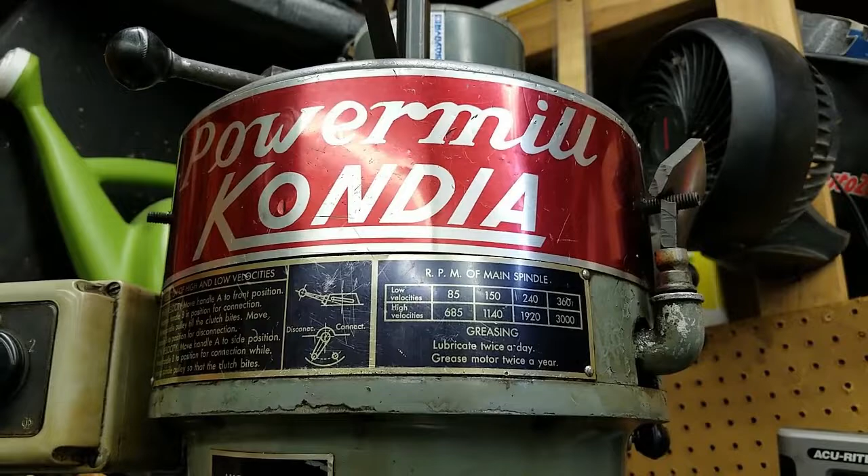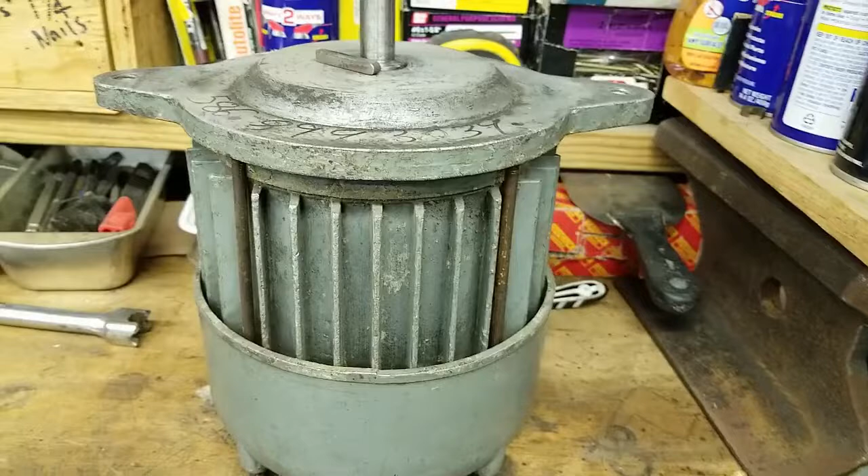Alright, what you're looking at here is the motor, the original motor I assume, off of the mill. And this mill is, I believe, from 1969.

Several weeks ago, I was doing some work. I've been doing quite a bit of job shop work out here. And I started smelling something funny, but I wasn't sure what it was. It didn't really smell electrical. And I had a problem with my switch, and I had redone my switch, so I didn't know if maybe it was some of the cleaning spray that I used burning off, but there was a smell.

Well, as I'm working, the lights in the garage flickered, the fluorescent lights above. And it was raining and storming outside at the time, so I thought, well, maybe it was starting to lightning or something. So I looked up to see if it did it again, waiting for a crack of thunder. And about that same time, I seen a little bit of smoke wisping up from the motor. So I hurried up and shut everything off because the spindle started slowing down on its own without even being under load.

And lo and behold, I reached up and touched the motor, and this casing was hot as fire. I mean, you could literally fry an egg on the thing. So I shut everything down and stopped working for the night.

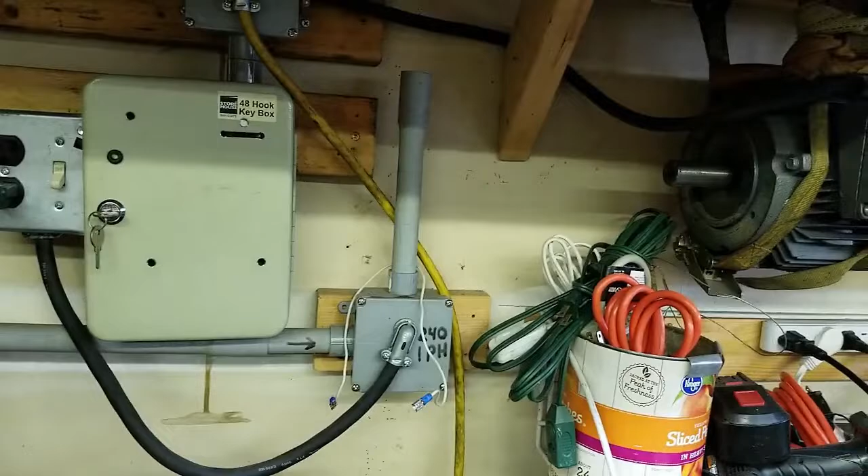So, I'm not an industrial electrician or anything, but I do my own work on certain items that I feel comfortable doing work on. So I'm like, well, is it the motor? Is my rotary phase converter going bad? I don't know. So here we are at the rotary phase converter - 3 horsepower, 3-phase motor. I've done a video on this.

The only thing I could think of that might have gone bad was a capacitor had popped or something. So I did the best I could, since I don't have a capacitance tester, but I tested the capacitors to see if they would accept a charge, a very light charge, and they did. They accepted the charge, and they could withdraw the charge using my digital multimeter. I checked everything else, all the wiring, to make sure all the connections were tight.

Everything seemed good. So I'm nervous about running any of my other machines at this time, my lathe and my surface grinder, because I don't know if the rotary phase converter is bad, and I don't want that burning up my other motors. So, what do I do, right? What do I do?

So, back over to the motor. I decided to remove this from the mill, and I disassembled it all the way down, took the armature out, the whole 9 yards. Right about now, maybe you're seeing some still pictures flashing because that's all I have of that work, because during this time I did have some work that needed to be finished.

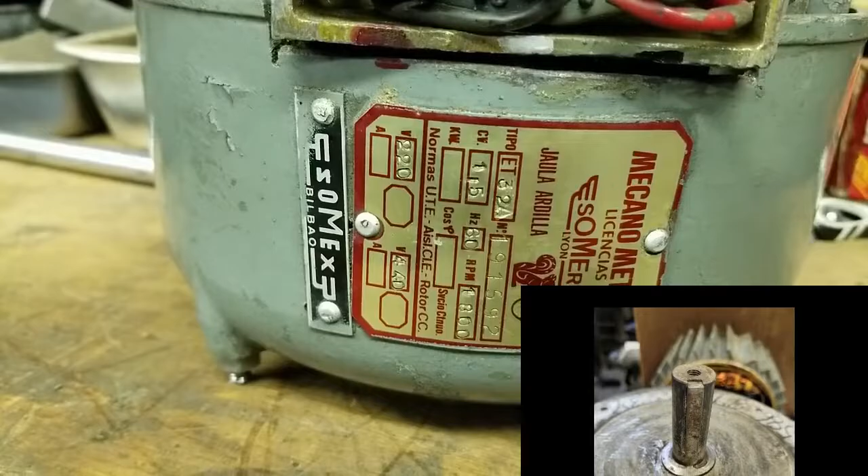So, took it all apart. I needed to measure a bunch of stuff. I needed to see what was going on. Some of the motor shops, electrical shops around here said if I give them a bunch of dimensions and some pictures, they could probably quote a price, an estimate, to rebuild the motor. So that was my intent, was to try to look for myself to see what was going on, as well as put some dimensions down on paper, get some still pictures, and send that out to see what kind of quote would come back for rebuilding this thing. So that's what I did.

You see the pictures. I could take a look at how this thing was constructed. This is a 1.5 horsepower 3-phase motor. I don't remember what the shaft diameter is right now. But you look at this thing and it's quite specific.

This here is the adjusting plate. I have a pulley, step pulley motor, or a mill. So you have a pulley here and a pulley that's on the main shaft. And then one of these is a pivot, and the other one is the lock. Looking at this, this would be the pivot, this would be the lock over here. Not important, but...

So what do I do, right? So I start hunting down motors. How much do motors cost? $400, $500, $600, you know, they're around. Some are on eBay, some are here, some are there.

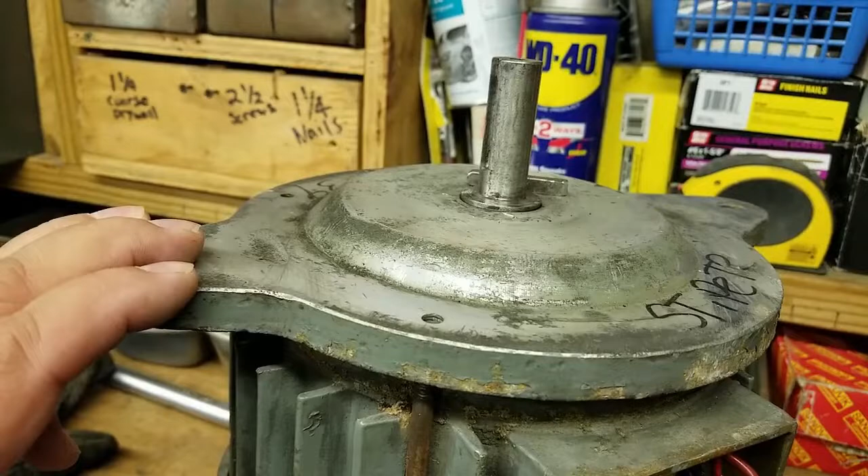Finally the quotes start coming in. I know this is long and it's all talking, but I did get a couple of quotes. One quote was for $4,000. I just laughed that off. I figured they just didn't need the work, they had plenty of work and they were just blowing me off. Another company said it would be a minimum of $1,000. Even then, it's an old mill - if I'm going to start spending $1,000, I might as well just buy a better used mill. So that was even a joke.

So I'm looking and looking, and I finally contact one of my friends who's been in the business forever. He gives me a name and number. They've got a motor that's in California, but it's like $850, plus another $100 and something for shipping. And guess what? The shaft is not the right shaft, so I'm going to have to do something anyhow - so it's not even ideal. Same thing on eBay - you could find lots of motors that are 1.5 horsepower, 3-phase, 1800 RPM, but the shaft is way smaller.

So I'm just hunting around. What do I got to do? Put everything back together quickly and try to limp through finishing up my work.

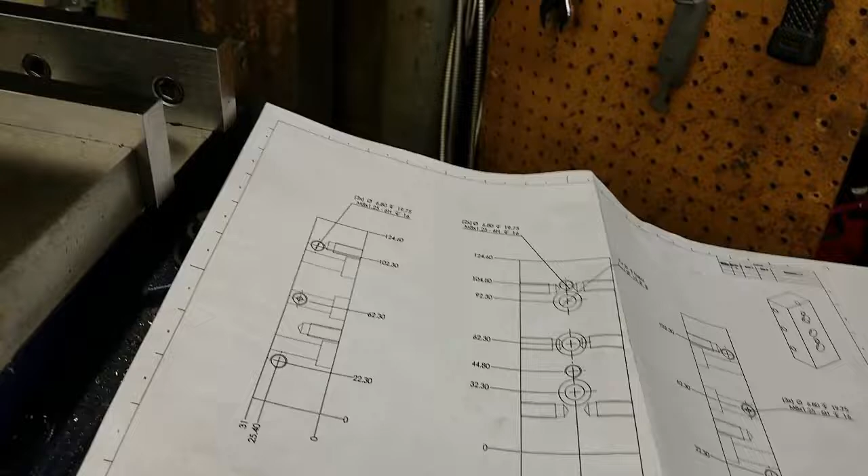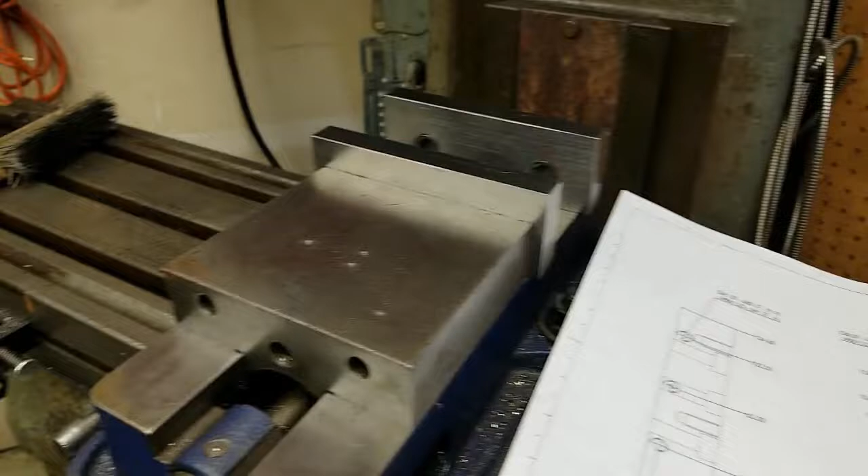At that point in time, all I could do is limp through on this mill. I could run the machine for maybe a consistent 35, 40 minutes before the motor was so hot you couldn't touch it. So I'm just barely doing the minimum amount of work that I can do - trying not to take long facing cuts, just because of the way the machine is acting. And it's very frustrating, it's very disheartening. I'm trying to get all the work done.

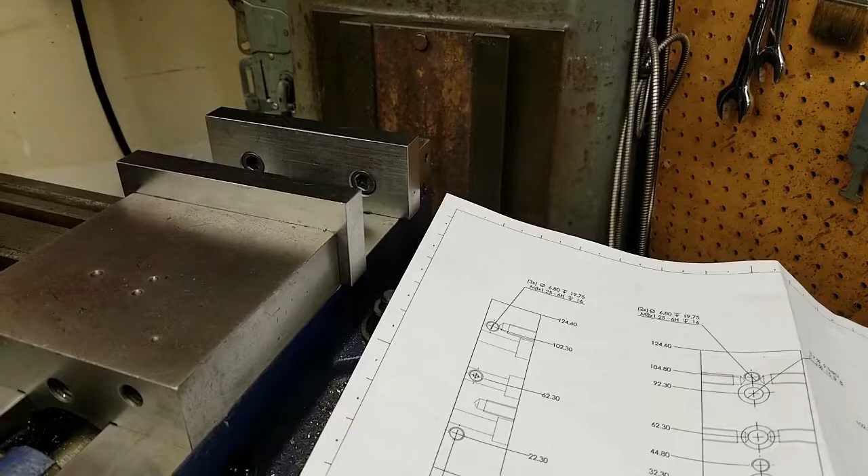Eventually I do run out of time. The customer wants their work back. I got to take a couple pieces back that I couldn't get to, just because the mill - I couldn't rely on it, and I didn't want it to go any further than it had already gone.

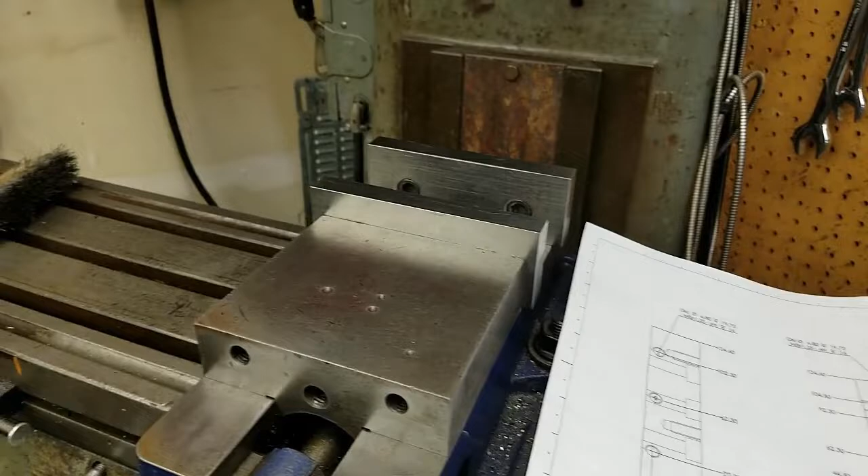So I'm almost out of options. I'm pricing out mills, trying to look at what some friends have. A couple of friends had some stuff for sale, but I got to move it, got to get it over here. Some of them didn't have digital readout, some had this, some had that, you know.

If I'm going to get another mill, I want to replace the step pulley with a variable speed. I want digital readouts - I do have a digital readout I could take off of here. I want the gibs and the ways and everything to be good. I don't want to have to live with problems like I do currently.

This mill I bought years ago, 5-6 years ago, and the mill, the digital readout, the vise - not this vise, my Wilton vise - rotary table were all $1,500 or so. So it was a good deal. I couldn't pass it up, and it got me started doing some machine work.

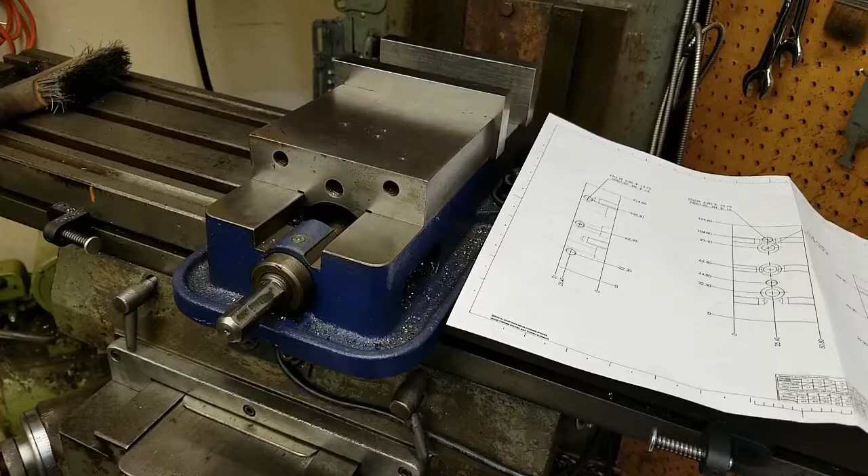So now I get on Facebook Marketplace and look to see if by chance somebody's got a motor on there. And there's a lot of motors. Well, I ended up coming across a guy that was within a couple miles of my house. He had a 1.5 horsepower 3-phase electric motor.

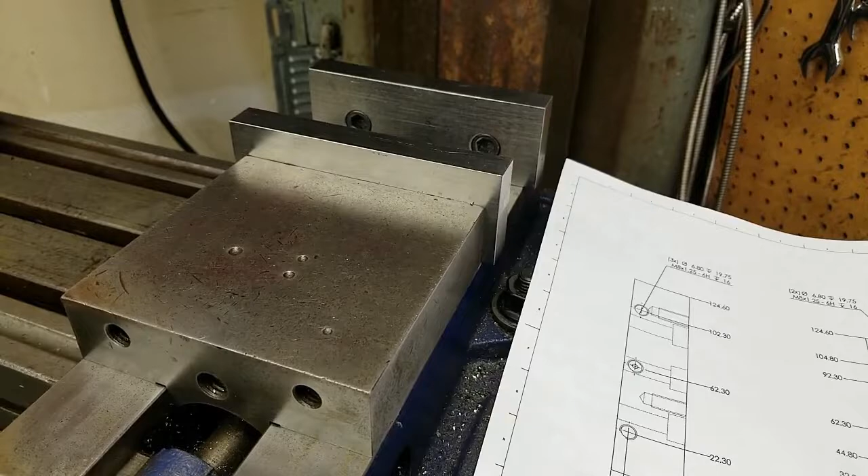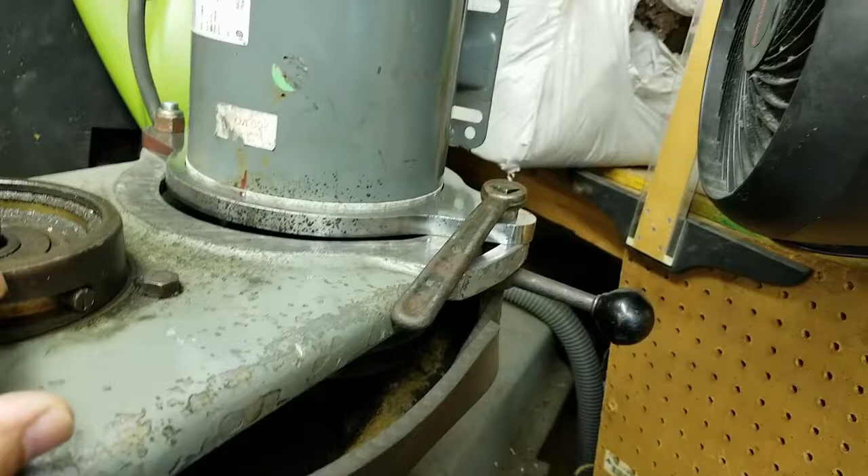And I'll show you what I got. Climb all the way up here. All right, here's the motor I got.

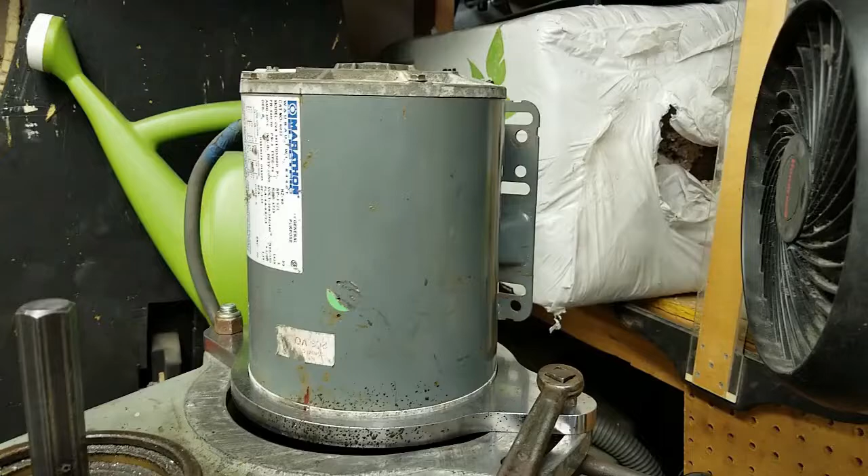Well, the guy had it on Facebook Marketplace, and he wanted $40 for it. He said we could test it when he got there. Well, when we got there, he had it plugged into the wall, just like a regular outlet. So obviously this thing is just humming, it's not doing anything. And I'm like, I thought you said we could test this. And he goes, well, we can, I got it plugged in, but it's not turning. And I said, well, that's just a regular wall - this is a three-phase motor. He didn't know even what three-phase was, didn't understand it.

So he's like, just take the thing. So I told him, I said, well, if I get it home and I can test it out and it works, I'll pay you for it. I'm not trying to get anything for free, but I don't want to buy something that doesn't work - I already got that at home. I got a motor that don't work.

So I get it, bring it here into the shop, and it sits on my cart for a little while because I had the work to finish. Finally I get around to testing this, and it worked. So it works, great, okay - I got a motor that works.

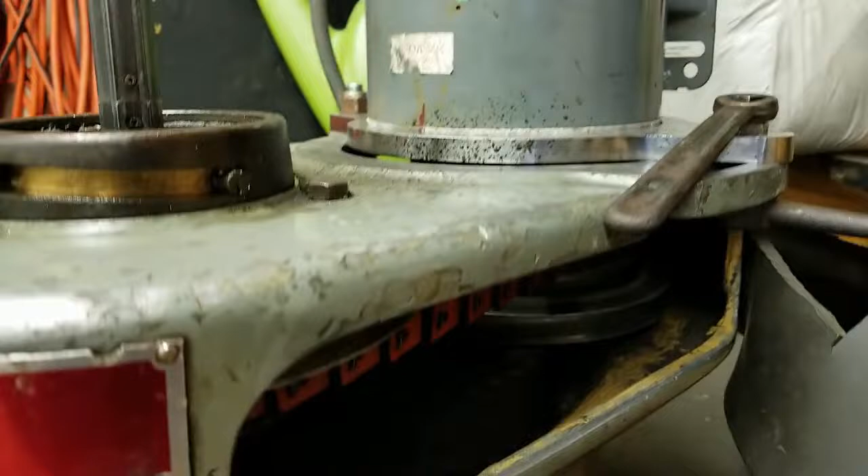It turns on, it spins, but this one is 1725, not 1800. So that's like a 5% difference in speeds - not a big deal, can live with that. Shaft is a little bit different size, so I made a sleeve. I wish I could show you that, but I cannot because it's hidden behind the pulley.

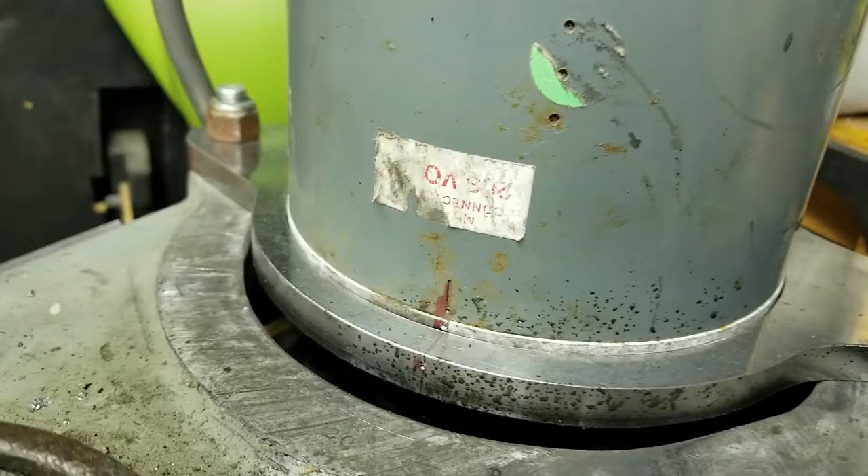The main thing I did was get this plate made. I was going to make it myself on a rotary table, but at work I have access to guys that run large 5-axis mills. So I quickly designed a plate in NX and had one of the guys cut it out of some mild steel, and came home with a plate that was finished.

Mocked it all up, realized I needed to cut a little pocket, which I don't know if you can see. Had to set the motor in about 5 millimeters so I had the right protrusion from the shaft, so the motor pulley was in the right position and the belt stayed aligned.

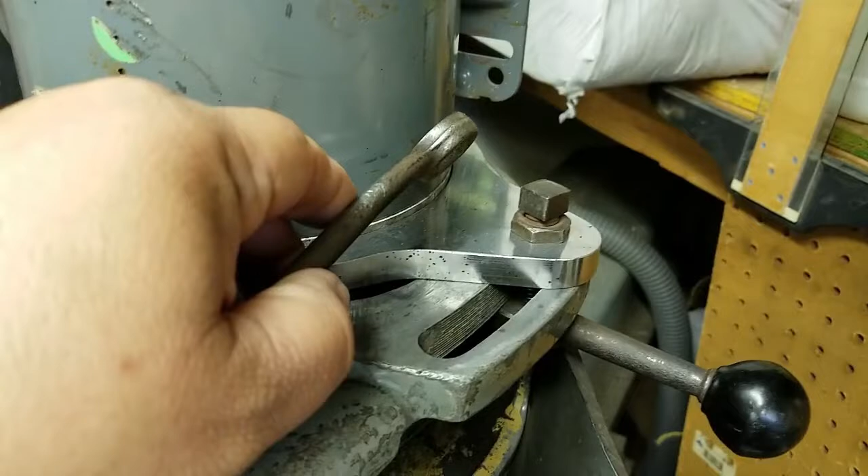The way it's held in there is the screws that are on the motor casing, I drilled and tapped 10-32s into this plate, and that's what holds it in here. Then I just drilled a couple of holes here, which I should have drilled and tapped just like the original, because they won't adjust easily, so that's why I got this wrench on here. I'm going to weld a jam nut on here, and that way it'll be almost like it's threaded.

That one I just used a nylock nut, and that stays in place. But everything works.

And that's the key, right? So, $4,000, $1,000 down to a plate from work and a free motor that I ended up paying $40 for to get this thing back up and running. And the difference in RPMs is almost invisible.

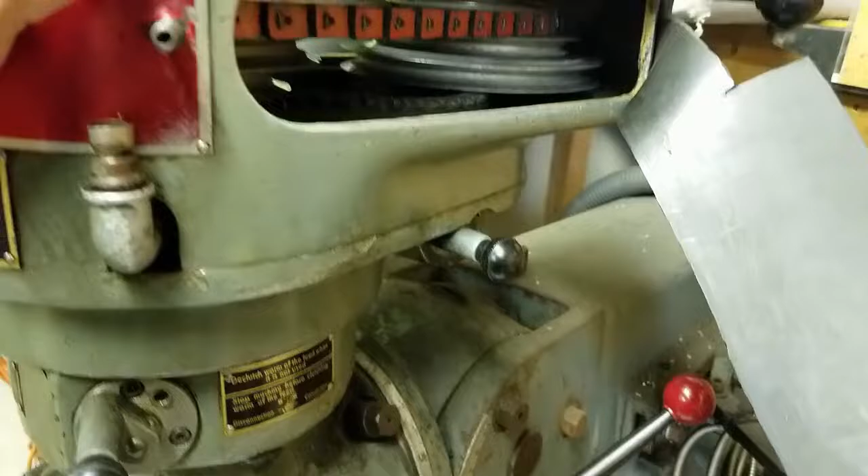So you can't just take the first thing that comes your way. Sometimes you got to think outside of the box and work around things. We've all got machine tools in our garages or shops or what have you, right? So let's use them. I could have limped through and made that plate.

I did start cutting one out of some plate stock that I have here. I torched it out and was just going to put it on the rotary table and cut it all around and do everything else. It probably wouldn't have been as pretty as that plate up there, but it would have functioned the same.

So that's the only video I have for you this week. And again, the still pictures kind of tell the tale. You see what's going on inside that motor and dealing with people getting quotes back to you, giving you the runaround on the quotes, prices that are just insane.

Look for every option you can explore. There's definitely a solution out there. It just matters how persistent you are at finding it.

For me, my wife will tell you that I'm a cheapskate, so even spending $400 on a motor, unless it would bolt right in... and we'll go back and look at that motor real quick one more time.

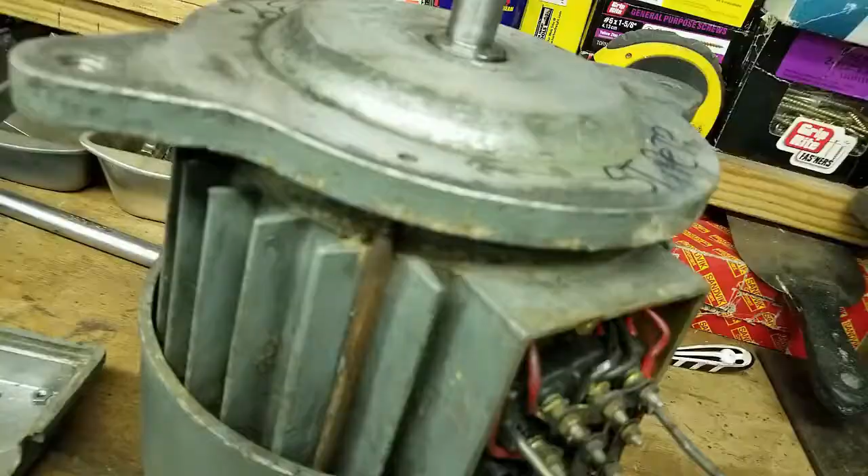I just wanted to reiterate the fact that this plate that the motor mounts to, and mounts to the mill, is part of this motor. Inside here is a cast and machined bearing cup for the shaft and the armature. So it's not like I could just take this off. I would have to do a lot of work to use this.

Plus, I don't know whether that other motor would have worked on this. I didn't bother checking it because this is not solid through here, it's all hollow in here. So I don't know where those screws fell on there. I did make a template, but I can't locate it right now, so I don't know how the other screw position would match the screw positions for here.

So it was just easier to make a new plate. Again, I had access to a machine to do it while my machine was pretty much down. So that's the route I took.

But I hope this, if somebody's having a similar situation with a bad motor or any kind of thing on their machine, there are workarounds. You don't have to find the exact replacement and pay the big cash that somebody wants. In this case, not being a Bridgeport, being a Spanish-made imported mill from 50 years ago, guess what? I don't think these parts are around.